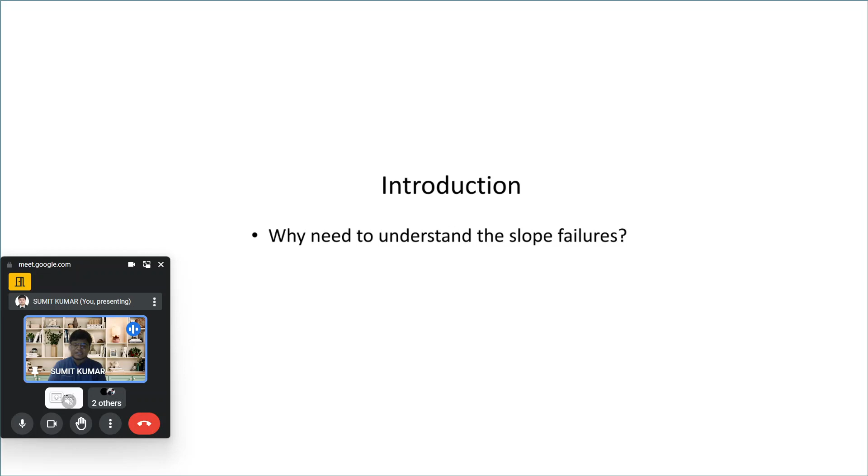We came to understand that there are several regions where slopes are present, and construction over there may sometimes be in danger, whether those are road projects or projects related to buildings. So these aspects need to be understood and taken care of.

So it's our duty that before construction at any place, whether the slope behind it will be stabilized or not, whether it needs to be stabilized, needs to be taken care of before construction of any habitation or building structure beside or ahead of that.

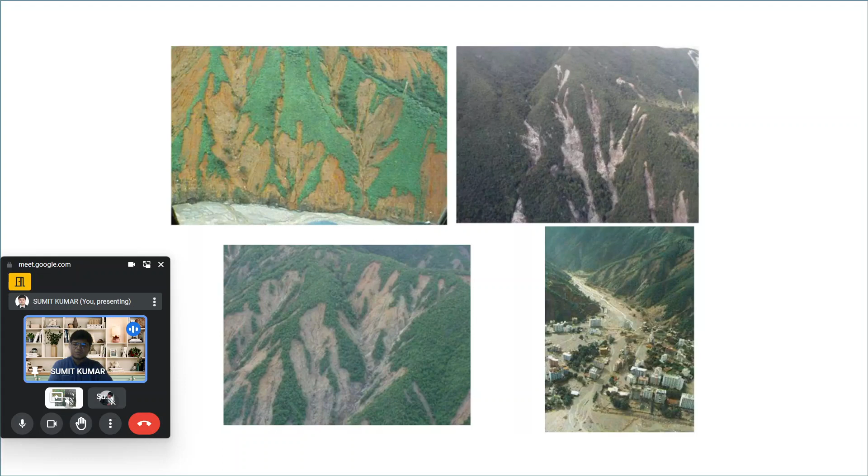In order to understand why we need to study slope and slope analysis, stability of slope analysis - again, a different Indian overall topographical image has been shown, so we can see there are several slopes, some very steep and very vast slopes also presented over here.

Okay, now we come to the section where we develop our understanding regarding the slope and its necessity. Okay, give me a minute, I will take some water.

Now the question is there about the slope and its necessity. An exposed ground surface that stands at an angle beta with the horizontal is called a slope. From the diagram, the facing slope makes an angle beta with the horizontal, which is the slope angle, and constructions take place along those slopes as well.

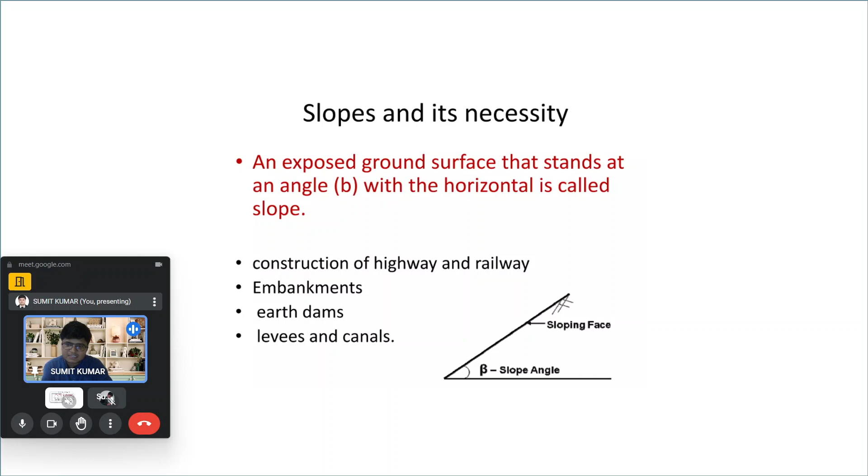The constructions of highway and railway embankments, earth dams, levees and canals could be there in order to provide proper communication as well as protection of people from different calamities.

We have already told that there are infinite slopes and finite slopes. If the section is confined, meaning it has a small section, the slope created is finite. But if the section is very wide across, the slope would be infinite.

When we talk about infinite slopes, they have dimensions that extend over a great distance. In theoretical aspects, the dimensions are very large, and the soil mass is inclined to the horizontal.

We have understood that the angle beta makes with the horizontal is the slope angle. When we talk about infinite slopes, that angle is very less, but if it is high, the slope may be finite at some point of time, as we will see as we proceed.

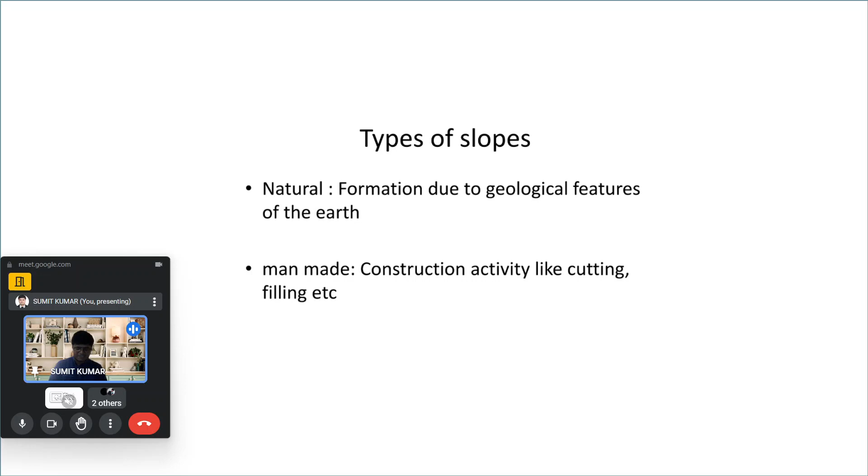Now we have a question: why are we interested in understanding slopes? There must be some outcomes we want to achieve, and that's why we are coming across these aspects. One of the points we want to understand with the help of understanding slopes is the failure of slopes.

The failure of natural slopes, landslides, and man-made slopes have resulted in much loss of life and destruction, as shown in the pictorial representation, where there is habitation and a large number of constructions. As the failure of slopes takes place, the soils fall down and get completely submerged.

That section leads to great destruction. The people residing there may be submerged in those hazards. That is a very disastrous aspect, so we need to understand it. Afterward, we will suggest whether construction activity should be there, and whether stabilization is needed, because the slope could be stabilized with various existing techniques, or new techniques could be achieved to make our understanding very clear. So the safety of natural slopes needs to be checked by civil engineers.

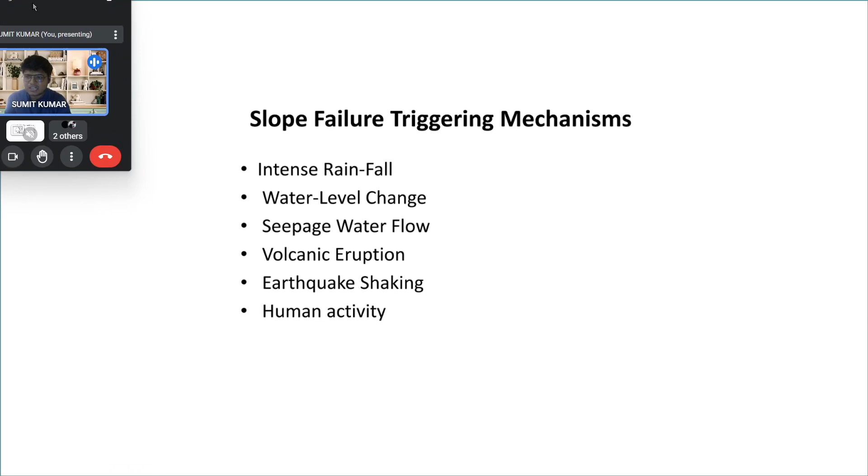When we talk about slope failure triggering mechanisms, we come across several news articles showing that floods or heavy rainfall cause failures. Specifically during the rainy season, we come across news articles about failures taking place due to heavy rainfall, especially in hilly regions like Uttarakhand or some sections in Himachal. In those hilly regions, we see that due to heavy rainfall, the failure of slopes takes place.

So during the rainy season, the change in soil stress takes place due to the change in the water table, because water is one of the reasons for the change in effective stress, as the pore water pressure changes due to an increase in the water table. Pore water pressure increases, so the effective stress gets reduced, and if the effective stress is reduced, the shear strength will also be hampered.

Because shear strength is nothing but S equals C plus sigma dash tan phi, where sigma dash is the effective stress. So if the effective stress gets reduced, the shear strength at that specific section also gets reduced. So if the stress acting there remains the same at that point of time, it will result in the failure of the soil at that section.

So the intense rainfall is one of the triggering mechanisms, and the change in water level takes place either due to rainfall or maybe some other reason like a water facility or a river filled with water, resulting in an increase in the groundwater table, which may result in a reduction in effective stress, concluding in an increase in pore water pressure.

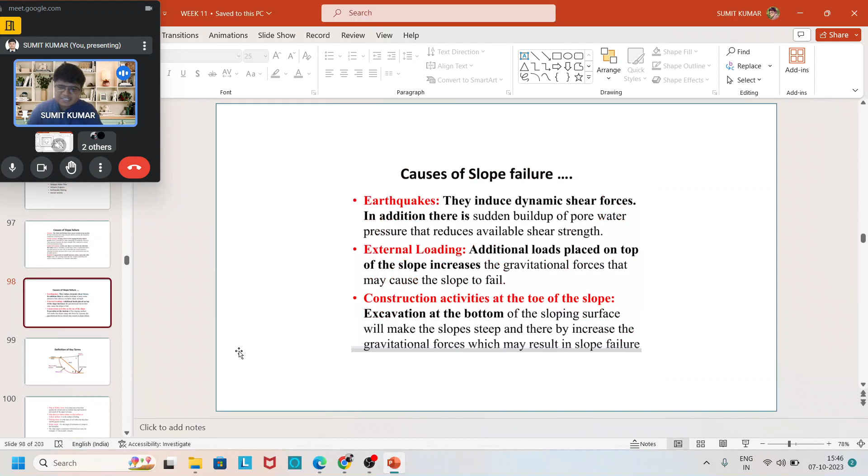Another cause is the earthquake. It induces the dynamic shear force, adding to the dynamic shear force at that section. In addition, there is a sudden build-up of pore water pressure that reduces the shear strength, because due to shaking the pore water pressure may increase, ultimately resulting in a decrease of effective stress. So the earthquake is one of the major reasons in that way.

Now see the external loading. When we talk about external loading, the additional load placed on top of the slope increases the gravitational forces, which may cause the slope to fail. It is not going to happen frequently, but this is also one of the reasons which lead to the failure of slopes.

Now the construction activity, which is a human activity that leads to the failure of slope. Construction activity at the toe of the slope, excavation at the bottom of the sloping surface, will make the slope steep, thereby increasing the gravitational forces which may result in slope failure. This is one of the aspects one needs to understand before considering the causes which lead to the failure of slopes.

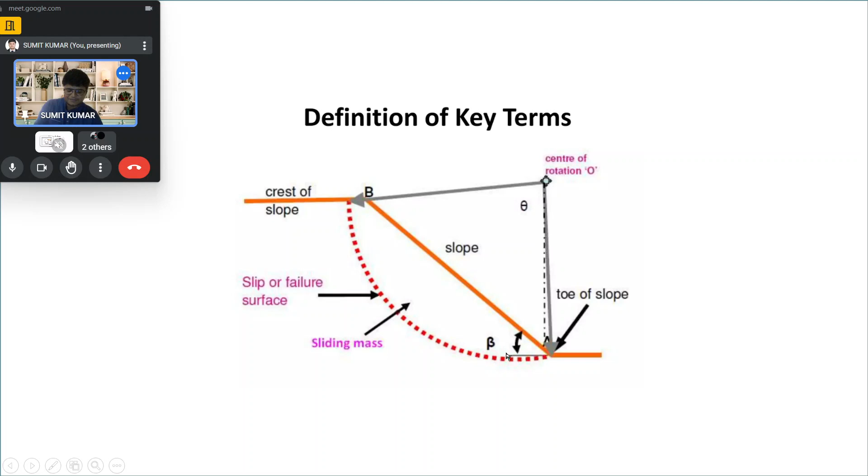Now the slope angle is sometimes referred to as a ratio, for example two horizontal, one vertical, or maybe three horizontal, two vertical. In this way, the slope angle is sometimes mentioned, not always as beta in degrees.

What we mean is that if we take two horizontal, one vertical, it means 2 meters in the horizontal direction, 1 meter in the vertical direction. If we take one horizontal, one vertical, that is 45 degrees - beta is 45 degrees in that case, because you can convert it into the tan angle. Here tan theta is 1 by 2, so theta equals tan inverse 1 by 2, and we are able to find the value of that component.

Now we talk about the type of failure. The failure could be broadly classified into three types: first is the face failure, second is the toe failure, and third is the base failure.

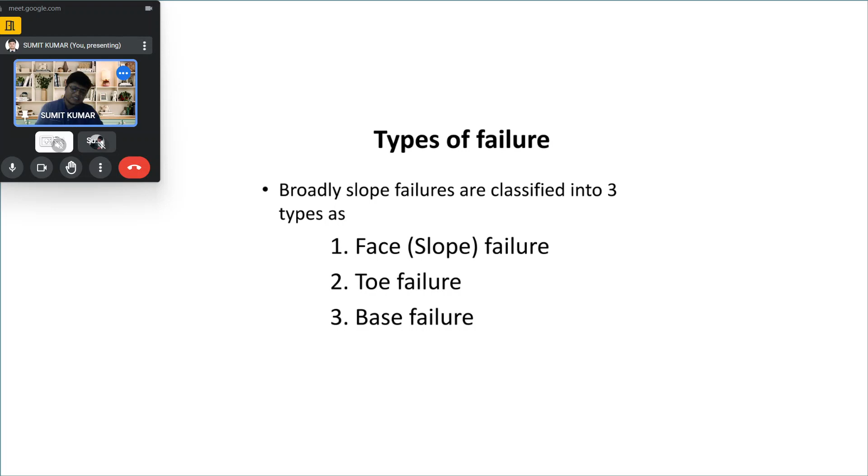When we talk about toe failure, the failure surface passes through the toe. This occurs only when the slope is steep and homogeneous, and the soil at the toe section is the weakest, which is why the failure takes place from this section.

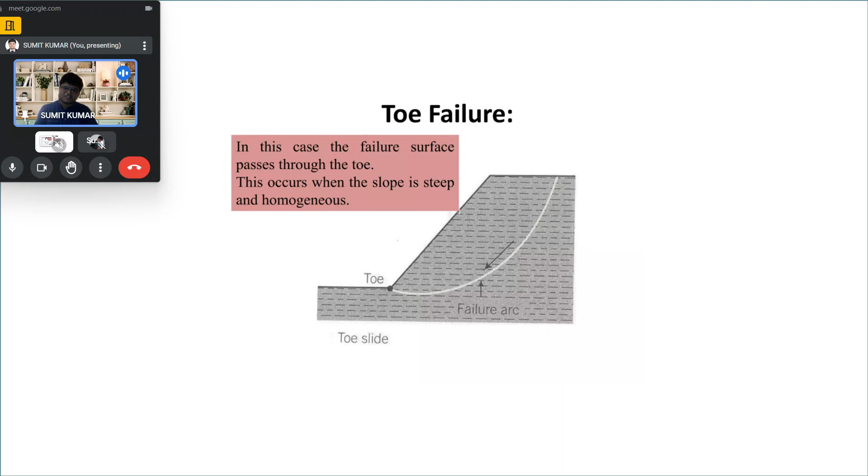Now when we talk about base failure, the failure surface passes through below the toe. This generally occurs when the soil below the toe is relatively weak and soft, so this type of failure takes place.

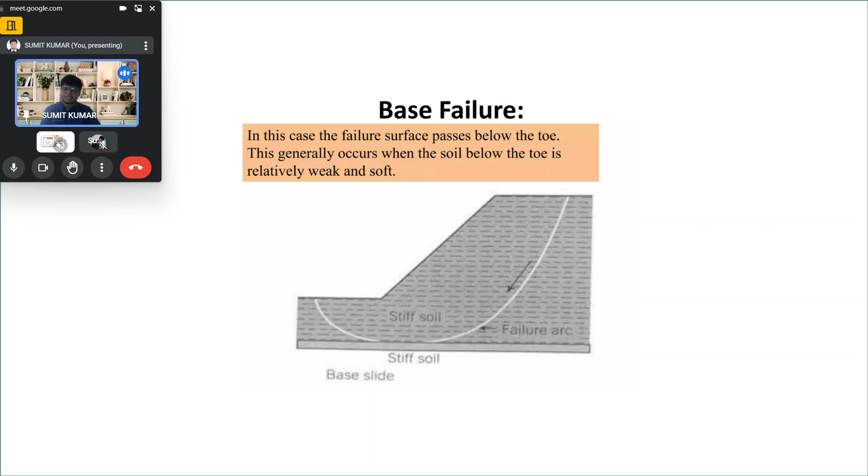We will see how the analysis takes place and how we find the factor of safety. First of all, the factor of safety of a slope is defined as the ratio of average shear strength of a soil to the average shear stress. As I stated, the strength is the maximum that section could sustain, and the shear stress is the value of stress acting at a specific point in time on that section where the maximum strength has already been mentioned.

Now, so the ratio of those terms will result in the factor of safety. The strength is above and the stress which has been applied will be below, and the ratio of those two terms will result in the value of the factor of safety at that section.

Now, the shear strength of the soil is given by tau f equal to C plus sigma tan phi, where C is the cohesion and phi is the angle of internal friction, sigma is the normal stress on the potential failure surface.

Similarly, the mobilized shear strength is given as tau d equal to CD plus sigma tan phi d, where CD and phi d are the cohesion and angle of internal friction developed along the potential failure surface, and the factor of safety becomes C plus sigma tan phi divided by CD plus sigma tan phi d.

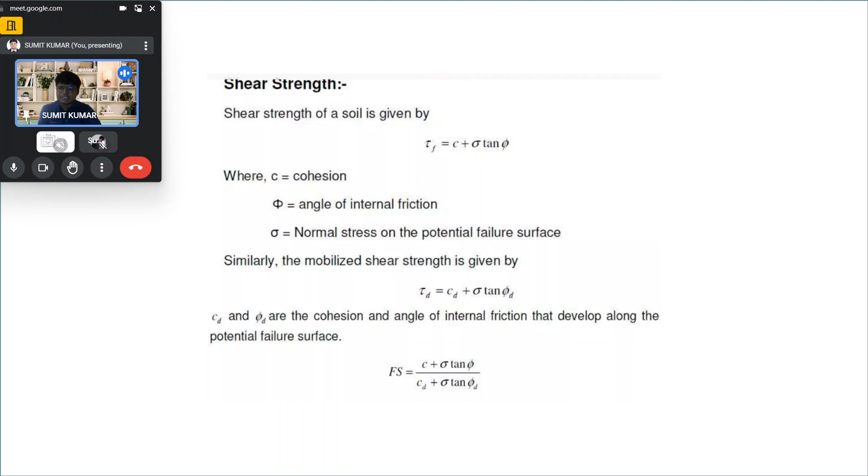So in this regard, we will state our result. The factor of safety with respect to cohesion will be C by CD, where CD is the mobilized cohesion, and when we talk about ultimate phi, F phi is equal to tan phi by tan phi d. So when we say FC equal to F phi, C by CD equal to tan phi by tan phi d.

So Fs equal to Fc equal to F phi. When Fs equal to 1, the slope is said to be in a state of failure, because Fs equal to 1 is the critical state. Just an increase in stress by a unit, or even by a decimal unit, will also result in the failure of the slope surface.

Now first of all, see the finite slope analysis. We will read that aspect first, then we will move ahead.

A finite slope is one with a base and a top surface, the height being limited because it is a finite height, finite surface. For an infinite slope, it is a high length, and from where it starts and where it ends we will not be able to identify very clearly, so we could not state that this much height would be there.

But in this case, the height being limited, the inclined faces of the earth dam, embankment, excavation, and the like are all finite slopes.

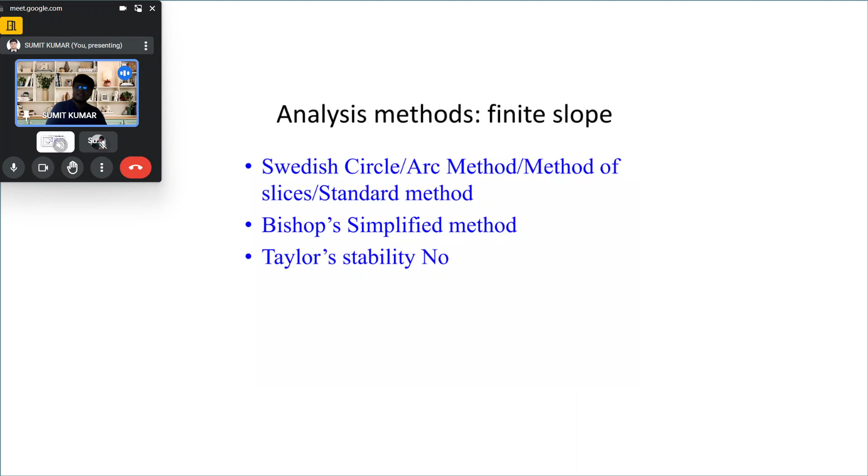Afterward, because this is a trial and error process when studying finite slopes, analysis methods that could be taken care of are like the Swedish circle method, arc method, method of slices, and standard methods. Apart from that, the Bishop method, Bishop simplified method, and Taylor stability number are some of the approaches that could be used.

Now the first is the Swedish circle method of slices for a cohesive frictional soil, like C-phi soil. It's adopted for general soils which have a combined grain of C and phi, the C-phi soils. For the undrained strength envelope shown by the C and phi values, the total stress analysis can be adopted in this regard.

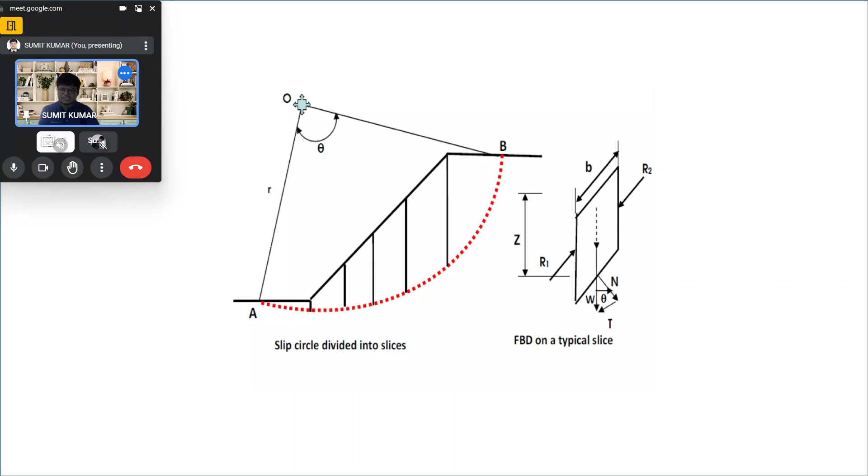Now the first procedure is to draw the slope to scale. A trial slip circle such as AB with radius R is drawn from the center of rotation, and divide the soil mass above the slip circle into a convenient number of slices, more than 5 preferred.

And determine the area of each slice as A1, A2, and AN, whatever the number we have divided, where A will be B into Z. So you see the free body diagram over there, B has been shown and Z has been shown, so the slice should look like that. So B into Z will be the area, and A1 to AN has been found.

Now determine the total weight W of the slice including external load. We are able to find this by B into Z, the area, known, multiplied with gamma, that is kilonewton per meter cube, so the kilonewton per meter load has been found for that section. So gamma is the unit weight, B is the width of the slice, and Z is the height of the slice.

In that way, we are able to find A1, A2, A3, AN. Now the reactions R1 and R2 on the sides of the slice are assumed equal and therefore do not have any effect on stability. The reaction R1 and R2 from both directions have been assumed to be the same, so both cancel each other. Now the weight W of the slice is set off at the base of the slice.

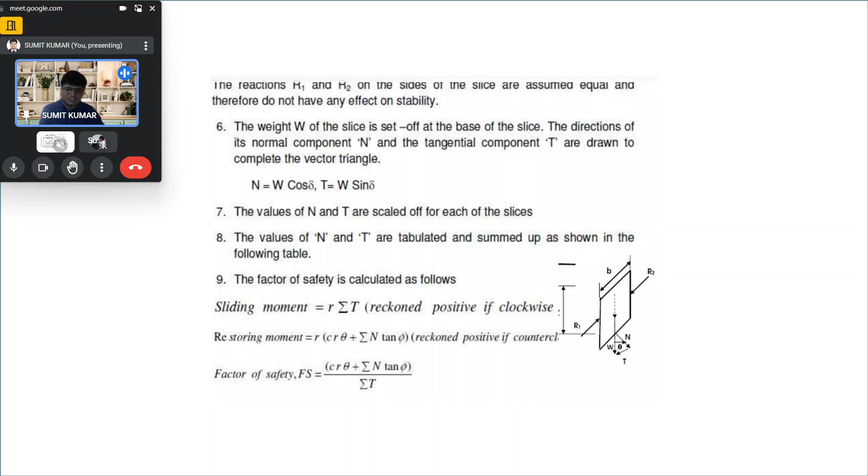Now n equals W cos delta, delta has been shown in the previous slide, and T equals W sin delta has been found, summation of n and summation of T is created. Then to find the factor of safety, we use C, the cohesion, R into theta, theta equals L by R, L equals R theta, and plus summation of n has been found and summation of t has been found, so we are able to calculate the factor of safety.

And now afterwards repeat step 2 to 9 by considering various trial slip surfaces. This has been created by taking one slip surface, and we have already said this is a trial and error method. Afterward, calculate the factor of safety again for each slip circle, and the slip circle with the minimum factor of safety, if the factor of safety is found to be 1, that is said to be the critical circle which has been found. So this is the trial and error process, not very difficult, but it is lengthy.

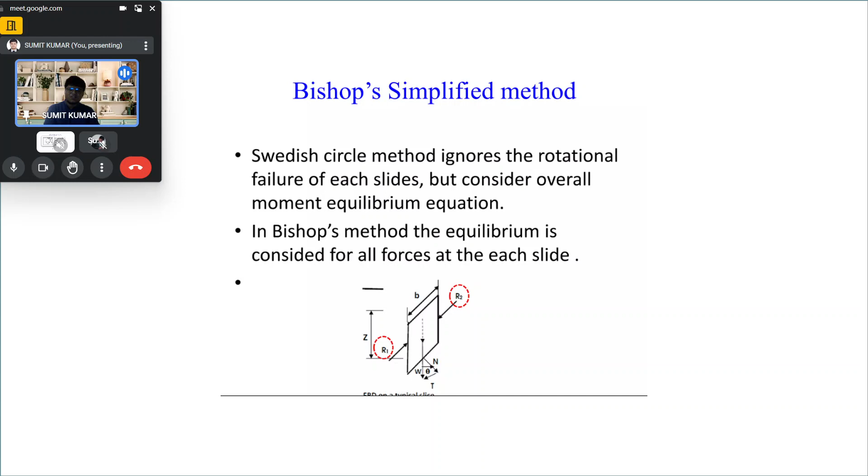Now see the Bishop simplified method. The Swedish circle method ignores the rotational failures, as we have ignored the reaction R1 R2 over there. So in this method, the Swedish circle method ignores the rotational failure of each slice but considers overall moment equilibrium conditions. With the Bishop method, the equilibrium is considered for all the forces at each slice, as we see over here.

Now we move to the Taylor stability number. In slopes, the Taylor stability number is widely used - the component of the self-weight gamma causes the instability, the cohesion contributes to the stability. The maximum height HC of the slope is directly proportional to unit cohesion and inversely proportional to unit weight. In addition, HC is also related to the friction angle phi u and the slope angle beta.

This can be expressed as HC equal to Cu by gamma into F, a function of phi and beta. When the function of phi and beta is dimensionless, the equation above is dimensionally balanced in one way or the other. Now Taylor has expressed the function of phi beta as the reciprocal of a dimensionless number, that is the stability number, popularly called the Taylor stability number.

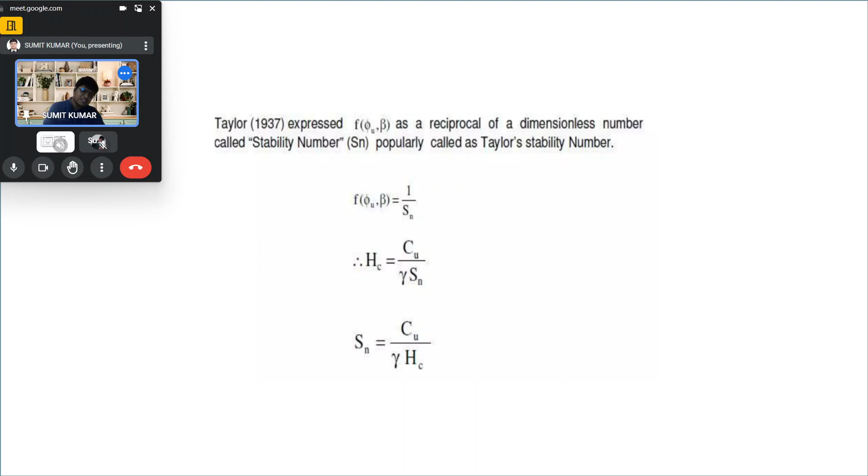So f(phi, beta) is 1 by Sn, and Hc equals C by gamma Sn, Sn equals C by gamma H into FOS, Sn equals C by gamma Hc, Hc equals H into FOS, so Sn equals C by gamma H into FOS. These things are now very much clear. Now we move to the infinite slopes.

So we move to the infinite slope analysis, the slope stability for the earthen dam for different conditions. What are the conditions?

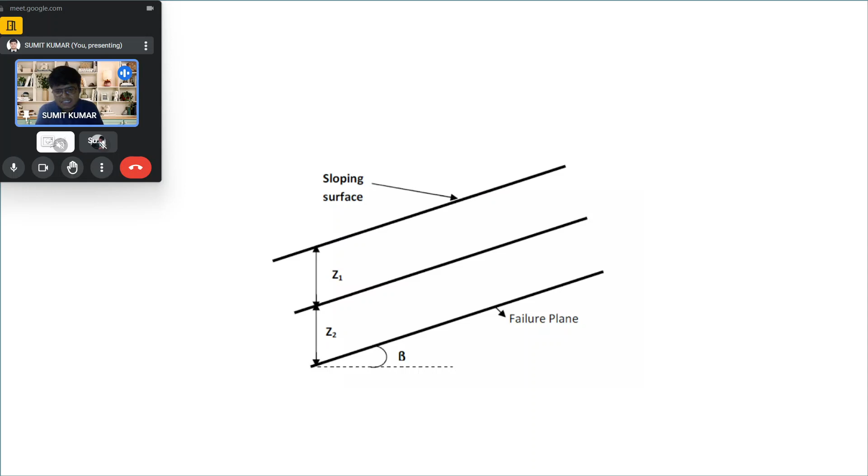When we go ahead, we will find the sloping surface has been shown, and the angle has been denoted beta, and this has a length that varies infinitely. Now, when we take into the analysis, we do the analysis for the cohesionless soil, cohesive soil, and the cohesive frictional soil.

So, infinite slope in the cohesionless soil. When we talk about the cohesionless soil, C is 0, only phi is there.

First of all, consider an infinite slope in a cohesionless soil inclined at an angle to the horizontal, that is beta. Consider an element ABCD of the soil mass, and let the weight of the element be W. The component of W parallel to the slope will be W sine beta, and perpendicular to the slope, N equal to W cos beta.

The force that causes the slope to slide is T equal to W sine beta, and the force that restrains the sliding slope is sigma tan phi, that is N tan phi, that is W cos beta tan phi. So the factor of safety against sliding is the resisting force divided by the sliding force: W cos beta tan phi by W sin beta.

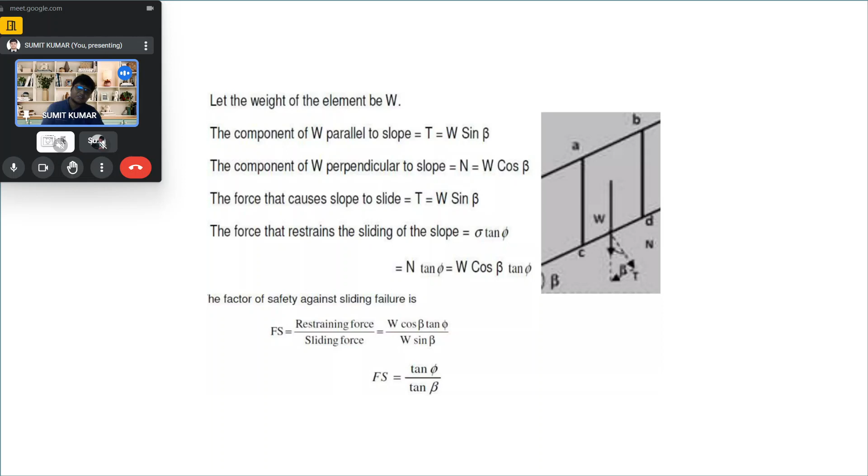So the W and W get cancelled, and ultimately sin beta by cos beta is tan beta, so the factor of safety becomes tan phi by tan beta. Now, applying the concept of limit equilibrium, under limiting equilibrium Fs equal to 1, so tan phi equal to tan beta, meaning beta equal to phi.

That is the critical combination. So the maximum inclination of the infinite slope in a cohesionless soil for stability equals the angle of internal friction of the soil. So whatever the angle of internal friction, that value of beta will be the critical combination for the infinite slope critical conditions.

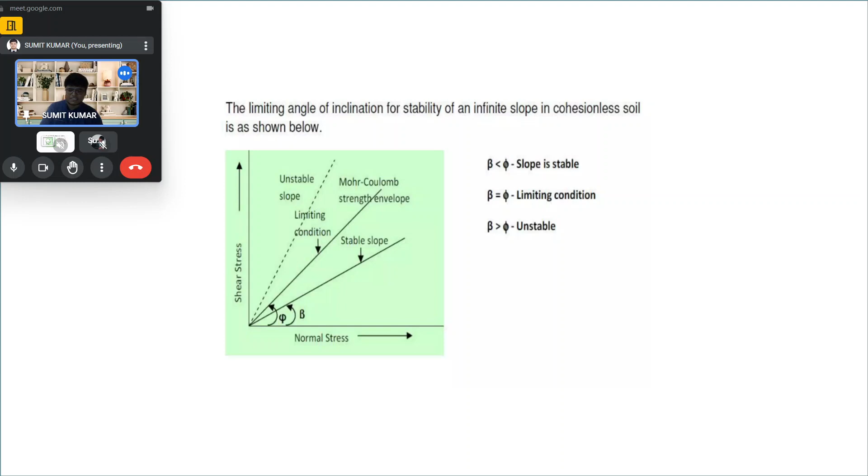So if beta is less than phi, the slope is stable. If beta is greater than phi, the slope is unstable. If beta is equal to phi, the slope is in the limiting condition at the verge of failure. If it has just increased beyond the value of phi, it will result in an unstable slope, that failure takes place. Now, see the infinite slope in the pure cohesive soil.

Again over here, the normal stress at the failure surface, sigma equal to N by L into 1, and cos beta equal to B by L. So L equal to B by cos beta, and where W equal to gamma Z B as earlier, and sigma equal to gamma Z B by B into cos square beta. So that gives gamma Z cos square beta. So sigma n equal to gamma Z into cos square beta.

Similarly, sigma n ultimately becomes this value. Now, tau d equal to T by L into 1, which is W sin beta by L into 1, that is W sin beta by B by cos beta. So this will result in gamma Z sin beta cos beta.

So the factor of safety becomes tau f by tau d, as C by gamma Z sin beta cos beta. So the factor of safety becomes C by gamma Z sin beta cos beta.

In another way, we also know the factor of safety. In general, we write it, and it becomes factor of safety equal to C plus gamma Z cos square beta tan phi by gamma Z cos beta sin beta.

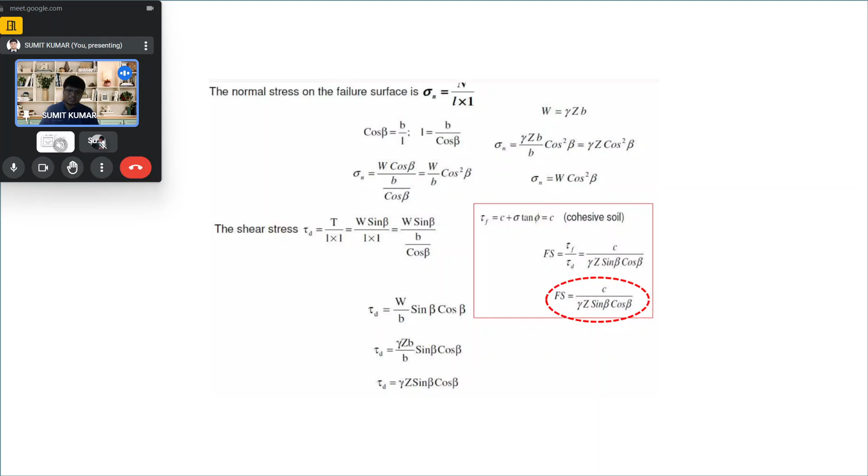We follow the same condition, but here phi is 0. Now, at the critical condition, Fs equal to 1, Zc equal to C by gamma sin beta cos beta, and for the given slope, Zc is directly proportional to the cohesion and inversely proportional to the unit weight.

So you see, C by gamma Z is the dimensionless quantity called the stability number, represented by Sn, and Sn equal to C by gamma H into FOS, where H into FOS is nothing but Hc, which is Zc in real sense.

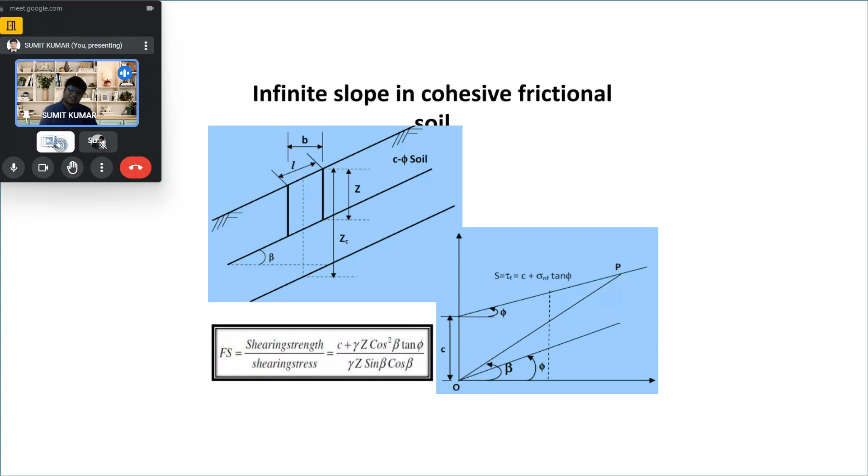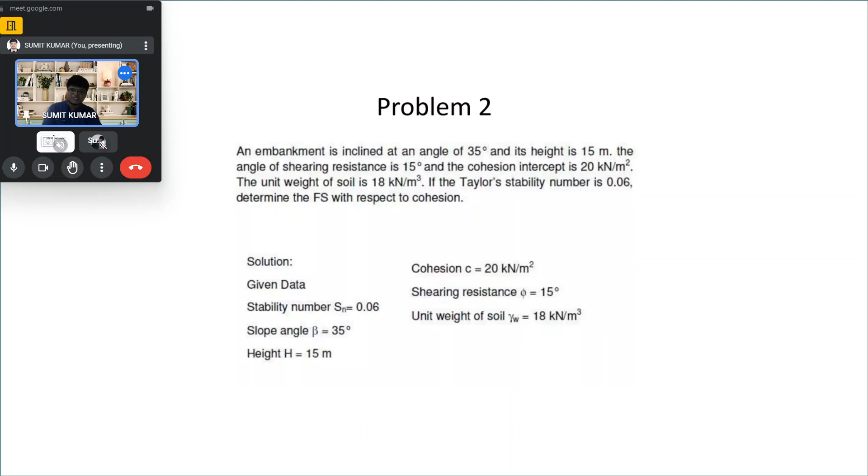First of all, there is a problem here, but I would like to skip this and take it up in the next section. I will take the stability of slopes again to some extent as a revision, and then we will close today's session.

Before moving to this, we will go with the bulkhead, which remained from the last session, and afterward we will come back here. So this is the section which was left during the last session.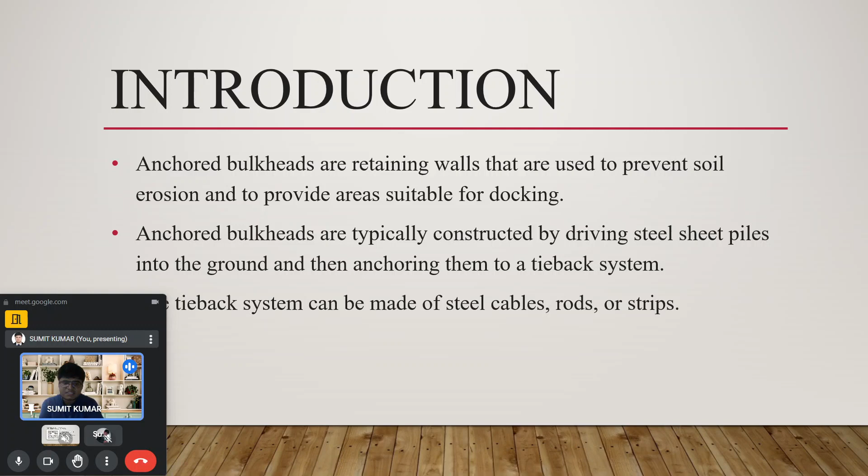Understanding bulkheads: anchor bulkheads are retaining walls used to prevent soil erosion and to provide area suitable for docking. Anchored bulkheads are typically constructed by driving steel sheet piles into the ground and then anchoring them into a tie-back system. A tie-back system can be made up of steel cables, rods, or strips. Anchor bulkheads are used in applications like waterfront construction, riverbank stabilization, highway and railway construction, and land reclamation.

Components of an anchored bulkhead: the sheet piles are the vertical wall that retain the soil. The tie-backs anchor the sheet pile to the ground. The waler is a horizontal beam that connects the top of the sheet piles. Coping is a cap that protects the top of the sheet piles from erosion.

The gravity bulkhead relies on its own weight to resist lateral pressure from the soil. There are two main types of anchor bulkhead: the gravity bulkhead and the cantilever bulkhead. The gravity bulkhead relies on its own weight to resist lateral pressure from the soil, and is typically used in shallow water applications.

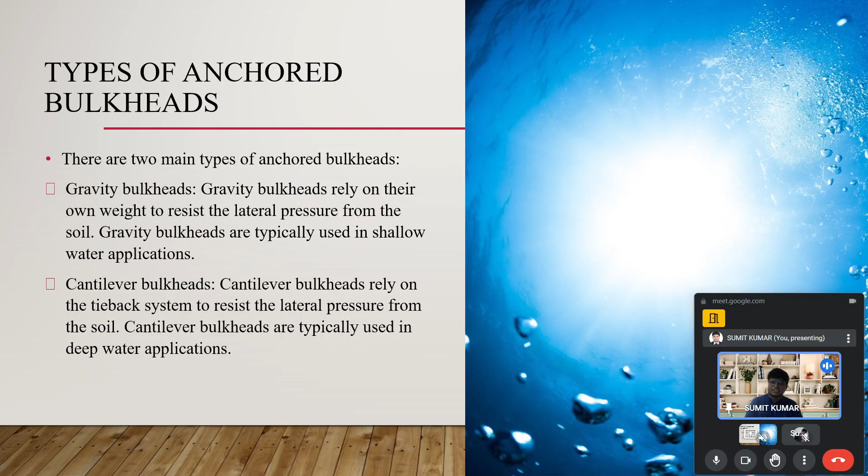Cantilever bulkheads rely on the tie-back system to resist lateral pressure from the soil. The cantilever bulkhead is typically used in deep water applications.

The design of the anchor bulkhead depends upon the type of soil, depth of water, height of bulkhead, and the surcharge load on the bulkhead.

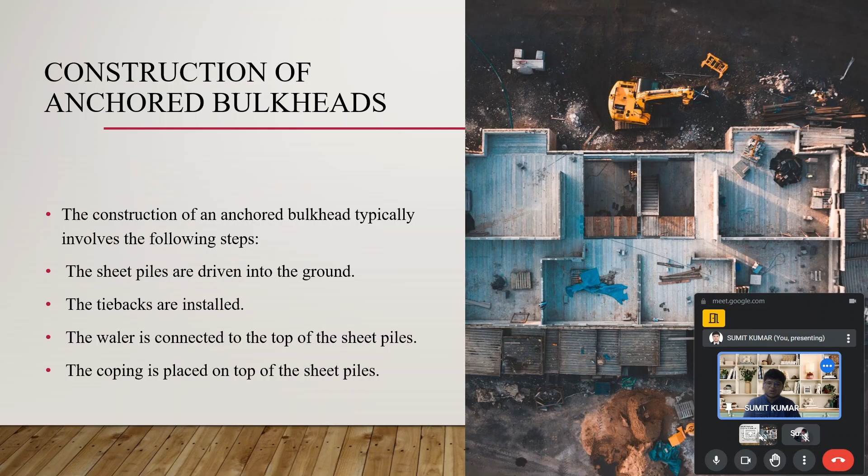Construction of an anchor bulkhead typically involves the following steps: sheet piles are driven into the ground, tie-backs are installed, and the waler is connected to the top of the sheet piles. Coping is placed on top of the sheet piles, the tie-backs are installed, the waler is connected to the top of the sheet piles, and the coping is placed on top of the sheet piles.

Advantages: it can be installed in a variety of soil conditions, it can be installed in confined spaces, it has high load bearing capacity, and it is relatively quick and easy to install.

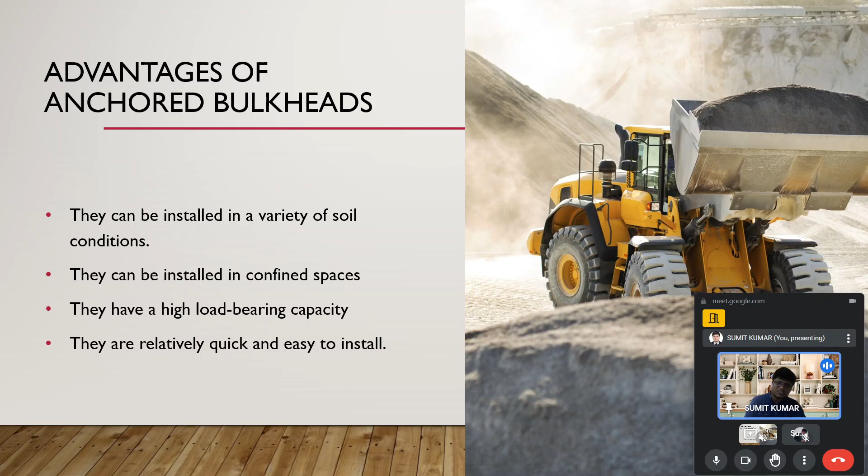It also has some disadvantages, like it is very expensive to install and requires regular maintenance and inspection, which also requires manpower, leading to an increase in cost. It is also susceptible to corrosion, so corrosion resistance work needs to be performed as part of the maintenance, in order to protect and extend the life of this section.

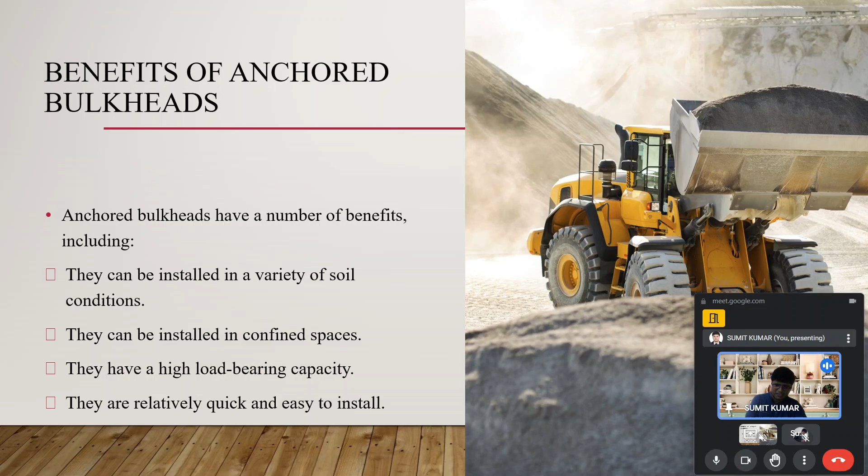Now, the benefits of the anchor bulkhead. Anchor bulkheads have a number of benefits, like they can be installed in a variety of soil conditions, they can be installed in confined spaces, they have a high load bearing capacity, and they are relatively quick and easy to install.

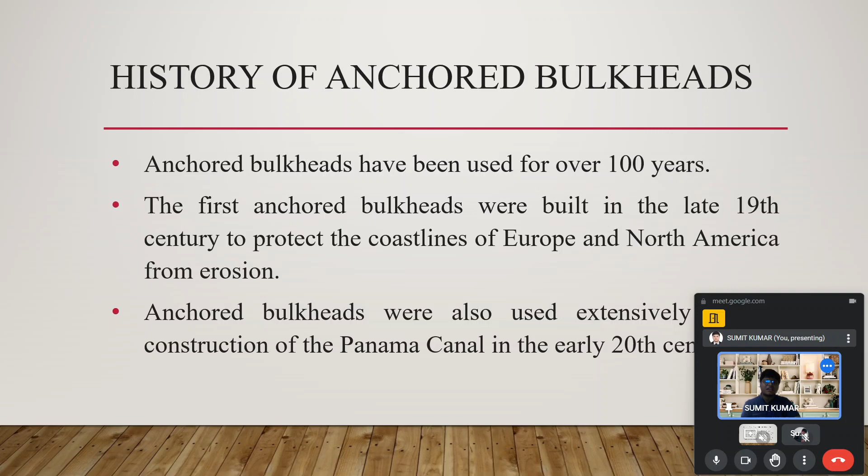The disadvantages were already covered, so I will skip that. Applications include waterfront and river bank stabilization, highway and railway construction, and land reclamation, also already covered. When we talk about history, anchor bulkheads have been used for 100 years. The first anchor bulkhead was used in the 19th century to protect the coastline of Europe and North America, and they were also used extensively in the Panama Canal in the early 20th century.

The types of tieback systems: passive and active are the two types. The passive tieback relies on the friction between the tieback and the soil to resist the lateral pressure from the soil. The active tieback relies on the tension in the tieback to resist the lateral pressure from the soil.

Now, the design procedure of the anchor bulkhead. First, the site investigation is taken, where the engineer will investigate to determine the soil condition at the site. Then structural analysis is performed, where the structural engineer will perform a structural analysis to determine the load that will be applied to the bulkhead. Then the design of the sheet pile wall takes place.

The structural engineer will design the sheet pile wall to resist the lateral pressure from the soil and the surcharge load. Then the design of the tieback system takes place, connecting the soil anchor, sheet pile wall, and the ground. The preparation of the site also takes place by leveling the ground surface.

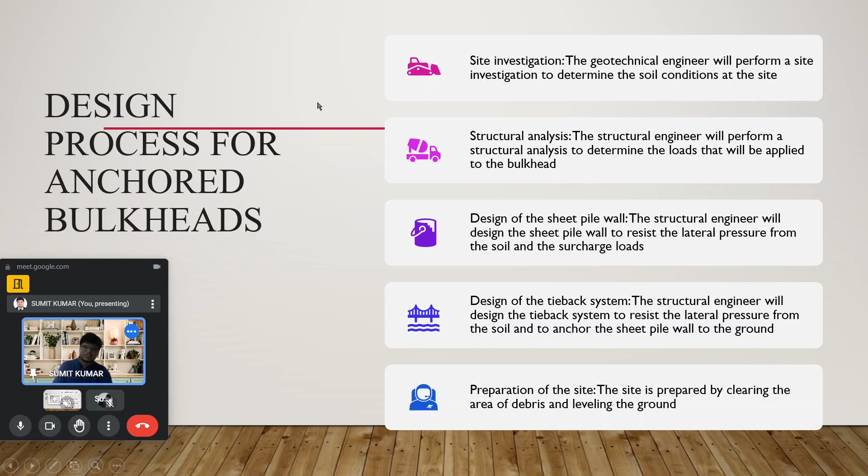Now, the construction process for the anchor bulkhead. It is processed in four steps. First, preparation takes place, then driving of sheet pile walls. We prepare the site by clearing the area of debris and leveling the ground, and afterward drive the sheet pile wall into the ground with the help of a vibratory hammer or a hydraulic hammer.

Afterward, the installation of the tieback takes place, in which a variety of methods are used, like driving, grouting, or jetting. Then the construction and coping processes take place. The coping is placed on top of the sheet piles for its installation.

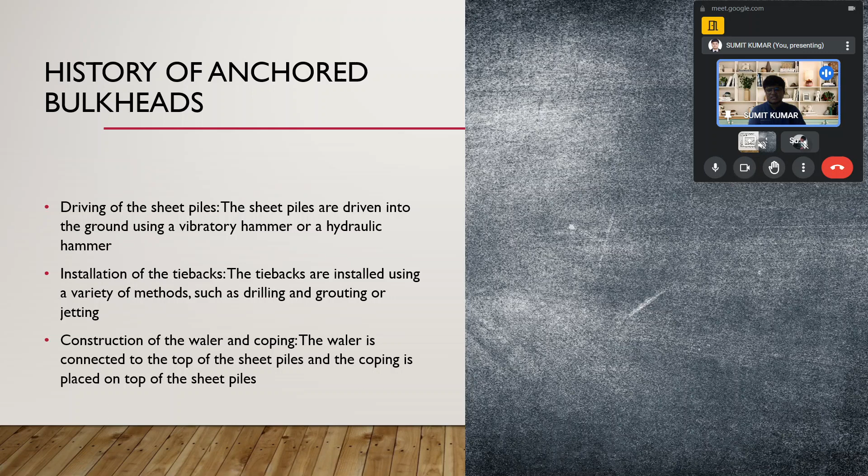Some more points: the sheet piles are driven into the ground using a vibratory hammer or hydraulic hammer, and the tieback is installed using a variety of methods such as drilling, grouting, or jetting. These are the same points which have already been mentioned.

Pile driving tests are performed to ensure that the sheet piles are driven to the correct depth and are properly embedded into the soil. Tieback load tests are performed to ensure the tieback can withstand the design load. Welding inspections are performed to ensure that the welds between the sheet pile and the waler are sound.

Now, when we talk about cost, the cost needs to be justified in anything we do. If the cost is too high or not easily achievable to do the construction work, we will avoid that. The cost of anchored bulkheads varies depending on a number of factors, including the size of the bulkhead, the site, soil condition, and the depth of the water.

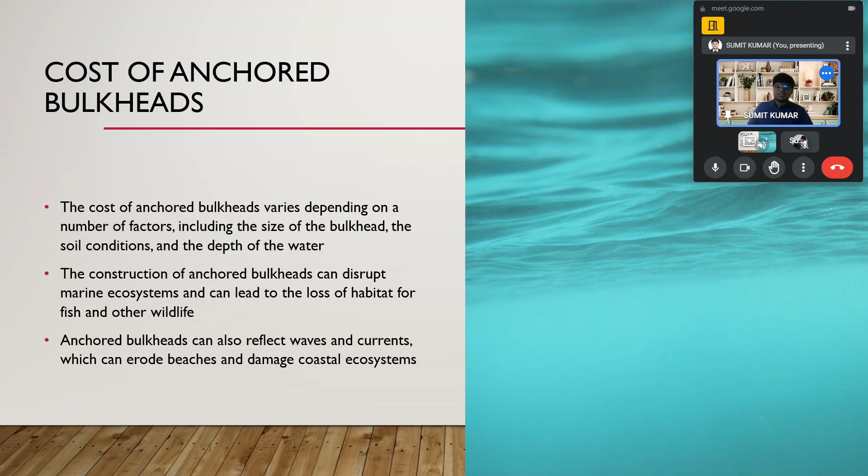The construction of an anchor bulkhead can disrupt the marine ecosystem and can lead to loss of habitat for fish and other wildlife. The anchor bulkhead can also reflect waves and currents, which can erode beaches and damage the coastal ecosystem. Now, regarding quality control and testing of the anchor bulkhead, this is an important part of the construction of the anchor bulkhead.

The following tests are typically performed to ensure the bulkhead construction is correct: pile driving, tieback load test, and welding inspection. The details have been mentioned here, you can go across if needed. These are extra points, not part of the core syllabus, but I will try to discuss them.

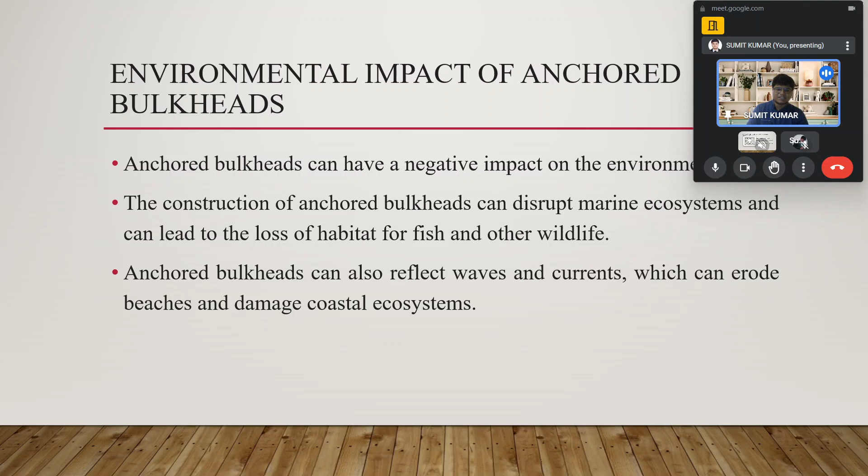The environmental impact of anchor bulkhead. Anchor bulkheads can have a negative impact on the environment. The construction of anchor bulkheads can disrupt the marine ecosystem and lead to loss of habitat for fish and other wildlife. Anchor bulkheads can also reflect waves and currents, which can erode beaches and damage the coastal ecosystem.

Let's look at some case studies. The Panama Canal was constructed in the early 20th century. Anchor bulkheads were used to support the canal wall. The anchor bulkheads at the Panama Canal are some of the largest and most complex anchor bulkheads in the world.

Talking about the second case, the Golden Gate Bridge, constructed in the 1930s. Anchor bulkheads were used to support the approach ramps of the bridge, and the anchor bulkheads at the Golden Gate Bridge are some of the most iconic anchor bulkheads in the world.

The third case, the Hoover Dam, was constructed in the 1930s. Anchor bulkheads were used to support the dam abutment, and the anchor bulkheads at the Hoover Dam are some of the most important anchor bulkheads in the world.

Now, concluding this section: anchor bulkheads can be installed in a variety of soil conditions, and they are versatile and effective retaining wall solutions. They can be used for a variety of applications. However, it is important to note that anchor bulkheads can be expensive to install and require regular maintenance and inspection.

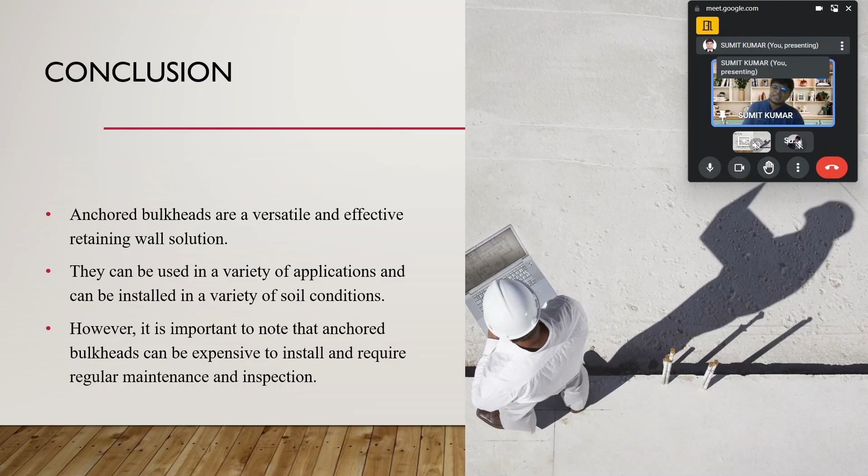Now we talk about cantilever sheet piles. What do we mean by cantilever sheet piles?

Okay, give me some minutes. Let's see. Give me a minute, I have to switch on the charging.

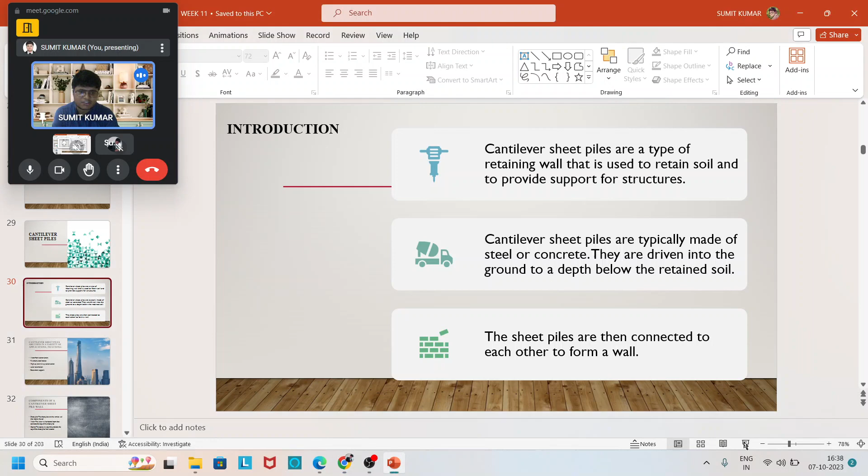Okay, we are talking about cantilever sheet piles. So what do we mean by this, and what is our understanding regarding the same? We will look into that. Cantilever sheet piles are a type of retaining wall that are used to retain soil and provide support for the structure.

Cantilever sheet piles are typically made of steel or concrete. They are driven into the ground to a depth below the retained soil. The sheet piles are then connected to each other to form a wall.

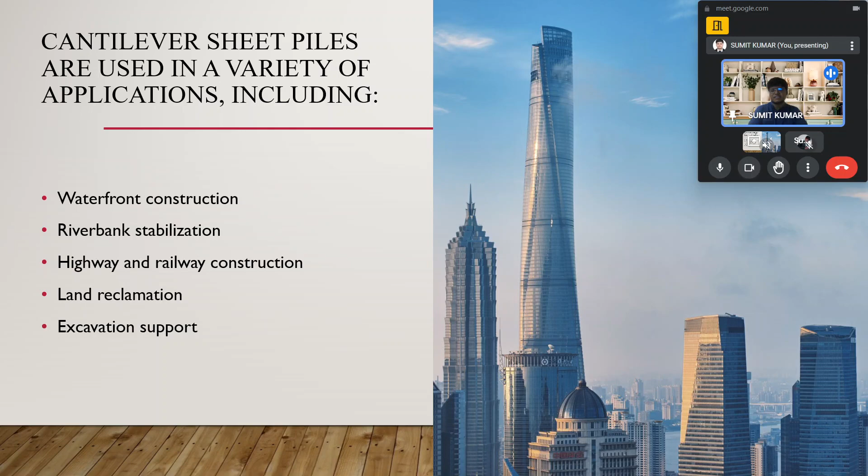When we go across, we will find that cantilever sheet piles are used for a variety of applications, like waterfront structures, as anchor bulkheads also serve that purpose, river bank stabilization, highway and railway construction, land reclamation, as well as excavation support. At all these places, cantilever sheet pile walls could also be used. Anchor bulkheads are also used, but this is also applicable.

When we talk about the components, they are also sheet piles, walers, and copings. The design of cantilever sheet pile walls depends on a number of factors like the type of soil, height of wall, or surcharge loads on the wall.

The construction of cantilever sheet piles typically involves steps like: the sheet piles are driven into the ground, the waler is connected to the top of the sheet piles, and the coping is placed on the top of the sheet piles.

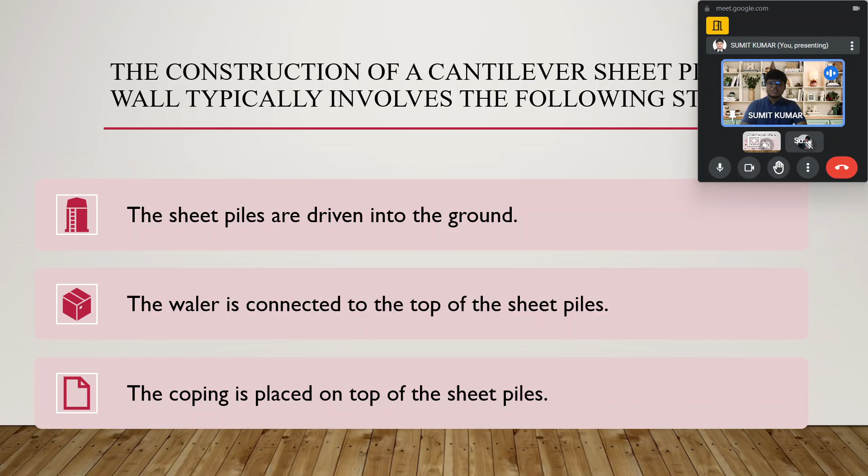When we talk about the advantages: they can be installed in a variety of soil conditions, they can be relatively quick and easy to install, and they have a high load bearing capacity and do not require a tieback or anchor system.

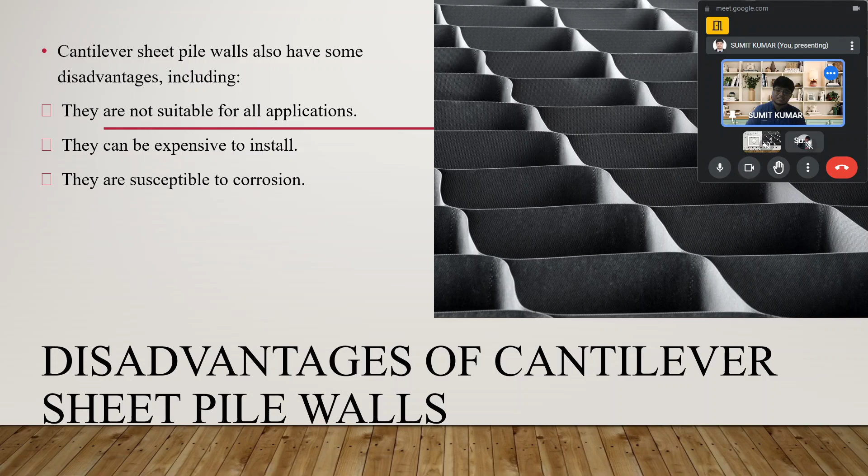Cantilever sheet piles also have some disadvantages, like they are not suitable for all applications, they are expensive to install, and they are susceptible to corrosion. This is also seen in comparison with the anchor bulkheads.

Now, when we talk about applications, we have already gone across this. Cantilever sheet piles are a versatile and effective retaining wall solution. They can be used in a variety of applications and can be installed in a variety of soil conditions. However, it is important to note that cantilever sheet pile walls can be expensive to install and require regular maintenance and inspection.

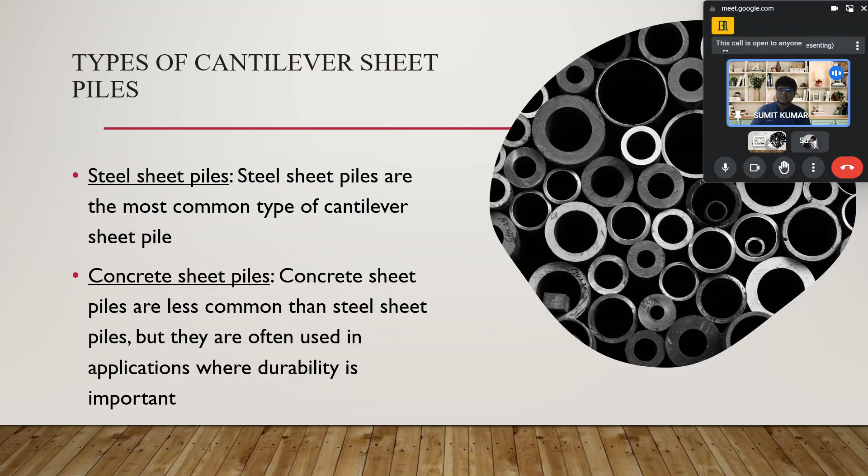Now, when we talk about the types of cantilever sheet pile walls, steel sheet pile walls are the most common type. Concrete sheet piles are also there, though less common than steel sheet piles, but they are often used in applications where durability is important because they have a long life.

Talking about the design, site investigations take place, and after that the design of sheet piles is performed. The construction design of the sheet pile wall is done by design engineers considering the soil, lateral earth pressure from the soil, and the surcharge load. Construction drawings take place, and the engineer prepares the drawing showing the layout of the bulkhead and details of construction.

The construction of the cantilever sheet pile wall involves preparation of the site, installation of sheet piles, and construction of the waler and coping.

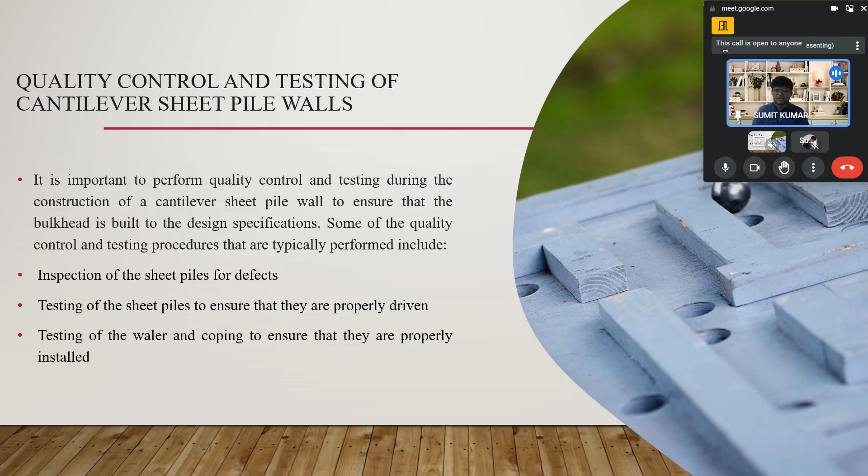Quality control and testing of cantilever sheet piles takes place afterward. It is very important to perform quality control and testing during construction to ensure the bulkhead is built to design specifications. Some typical quality control testing procedures include inspection of sheet piles for defects, testing of sheet piles to ensure they are properly driven, and testing of the waler and coping to ensure they are properly installed.

When we talk about cost, the cost of cantilever sheet piles depends on a number of factors like the size of the wall, type of soil, and complexity of design. Cantilever sheet pile walls can be expensive to install, but they are durable and long-lasting solutions.

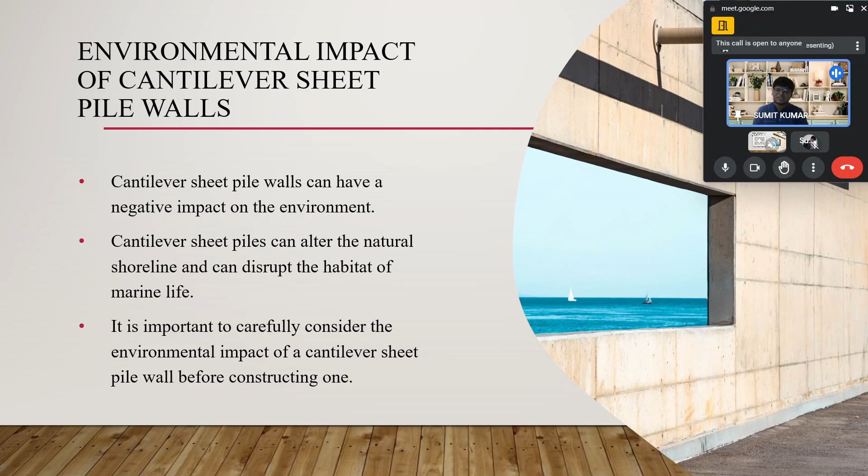When we talk about environmental impact, cantilever sheet pile walls can have a negative impact on the environment. They can alter the natural shoreline and disturb the habitat of marine life, but it is important to carefully consider the environmental impact before construction.

For case studies, the first is the Port of Los Angeles. It is one of the busiest ports in the world, and cantilever sheet piles are used to support the piers and docks there. The cantilever sheet piles at the Port of Los Angeles are some of the largest and most complex in the world.

The second case study is Hudson River Park, a waterfront park in New York City. Cantilever sheet pile walls are used to support the park's upland and protect it from flooding. The sheet piles at Hudson River Park are some of the most important and iconic in the world.

The third case study is the Three Gorges Dam, the largest hydroelectric dam in the world, where cantilever sheet piles were used to support the dam abutments. These sheet piles at the Three Gorges Dam each have their own unique type, not commonly seen elsewhere.

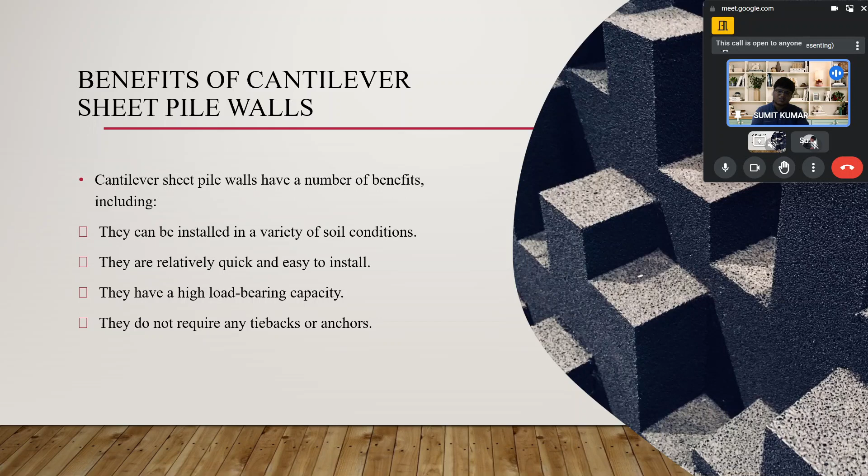Now talking about the benefits of sheet pile walls: they can be installed in a variety of soil conditions, are relatively quick and easy to install, and have high load carrying capacity without requiring tie backs or anchors. As for disadvantages, they are not suitable for every application, can be expensive to install, and may be susceptible to corrosion.

Concluding remarks for this section: cantilever sheet pile walls are versatile and effective retaining wall solutions. They can be used in a variety of applications and installed in a variety of soil conditions. However, it is important to understand that they can be expensive to install and require regular maintenance and inspection.

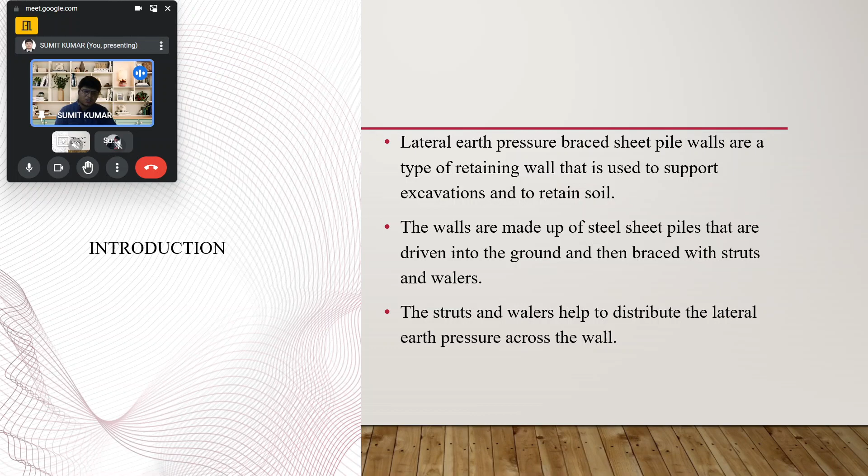The wall is made up of steel sheet piles that are driven into the ground and then braced with struts and walers. The struts and walers help to distribute the load from the lateral earth pressure across the wall.

Lateral earth pressure braced sheet pile walls are used in a variety of applications like deep excavation, tunneling, waterfront structures, slope stabilization, and land reclamation.

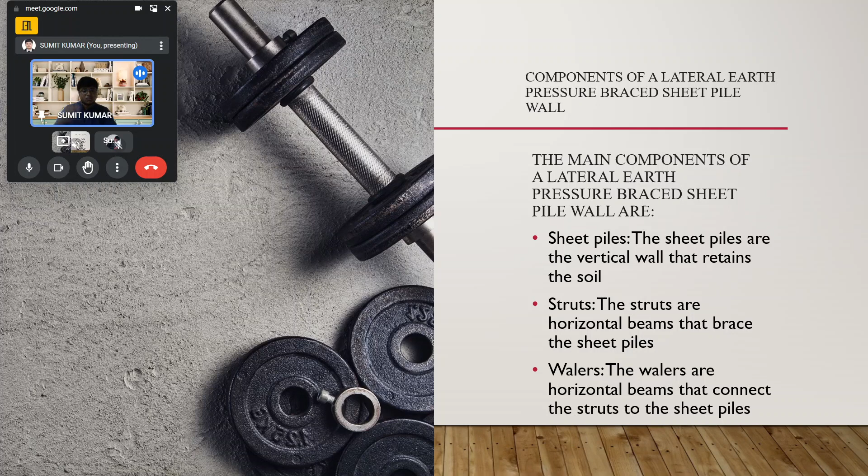The main components of the lateral earth pressure braced sheet pile walls are the sheet pile itself, which is the vertical wall that retains the soil, the struts, which are the horizontal beams that brace the sheet pile, and the walers, which are the horizontal beams that connect the struts to the sheet piles.

Now let's look at the design of lateral earth pressure braced sheet pile walls. This is a complex process that should be performed by a qualified person, and includes steps like site investigation, design of the sheet pile walls, design of the bracing system, and then construction drawings.

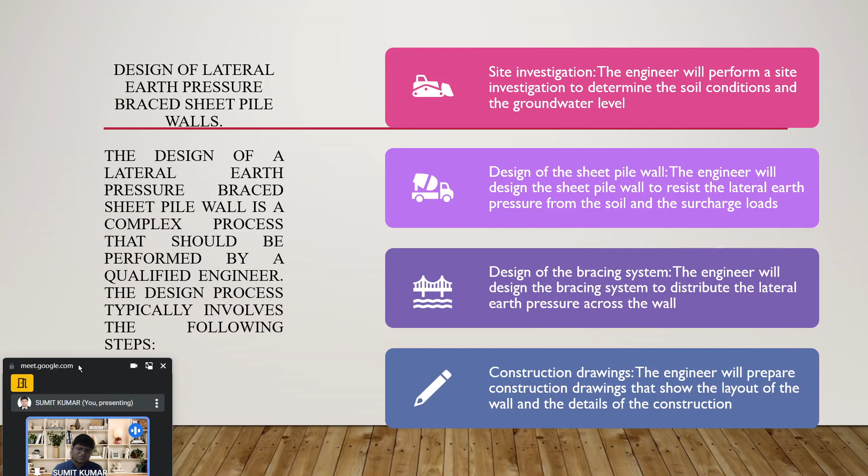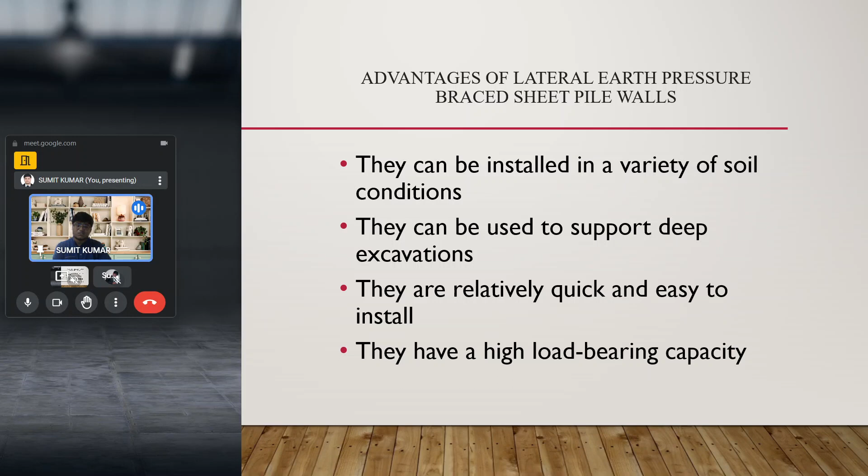Moving to the advantages of lateral earth pressure braced sheet pile walls: they can be installed in different types of soil and can support deep excavation. They are relatively quick and easy to install, and have high load bearing capacity.

Now, talking about applications of lateral earth pressure sheet pile walls, it could be used in waterfront constructions.

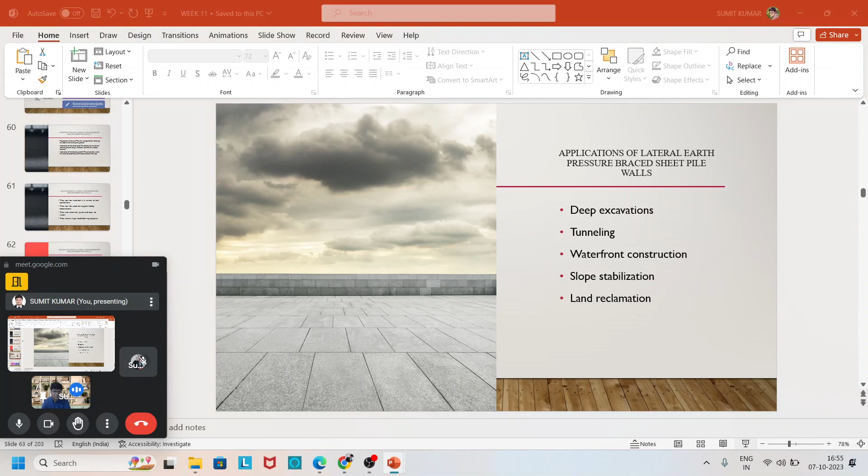Okay, so we are talking about the application of lateral earth pressure braced sheet pile walls. We will finish it quickly. The applications of lateral earth pressure braced sheet pile walls are in deep excavation, tunneling, waterfront construction, slope stabilization, and land reclamation.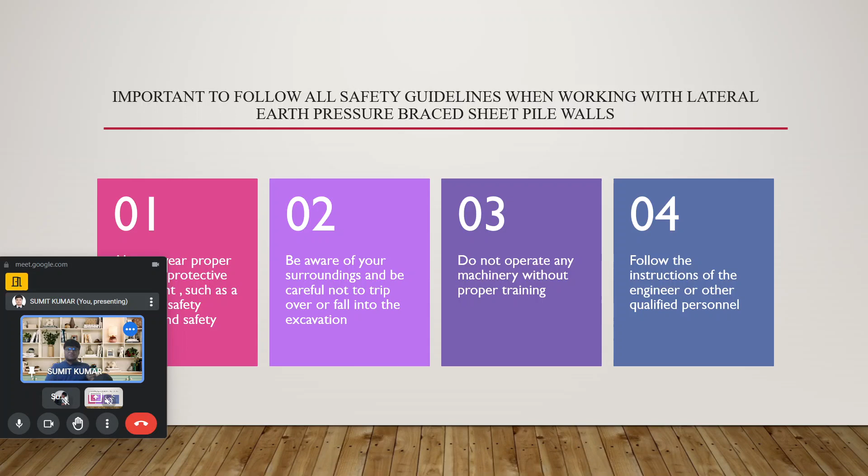It is important to follow all safety guidelines when working on a lateral earth pressure braced sheet pile walls, because safety is also required, otherwise accidents could take place during this work. So we need to take care of that. Always wear proper personal protective equipment such as a hard hat, safety glasses, and safety boots. Be aware of your surroundings and be careful not to trip or fall into the excavation. Do not operate any machinery without proper training. Follow the instructions of the engineer or other qualified person.

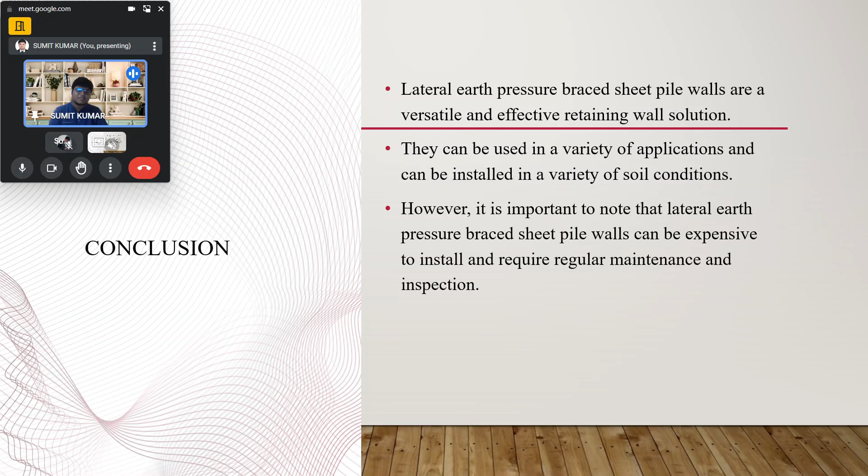Concluding this section, lateral earth pressure braced sheet pile walls are a versatile and effective retaining wall solution. They can be used in a variety of applications and installed in various soil conditions. However, it is important to note that they can be expensive to install and require regular maintenance and inspection.

Talking about lateral earth pressure braced sheet pile walls again from another perspective, very quickly. Starting with the definition: lateral earth pressure is the horizontal force exerted by the soil or other material against a retaining structure. It arises due to the natural tendency of soil to move and redistribute when subjected to external loads.

Talking about its importance in civil engineering, lateral earth pressure is crucial as it directly impacts the design and stability of retaining structures like walls, foundations, and embankments. Understanding and managing lateral earth pressure is essential for constructing safe and durable infrastructure.

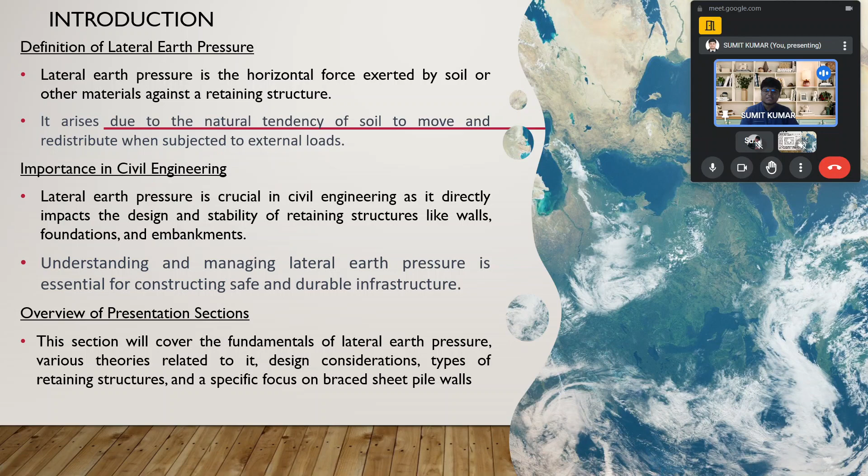Overview of the present section: this section will cover the fundamentals of lateral earth pressure, various theories related to it, design considerations, types of retaining structures, and a specific focus on braced sheet pile walls.

The two primary theories used in understanding lateral earth pressure are the Coulomb earth pressure theory and the Rankine earth pressure theory. This theory provides the foundation for the designers in retaining structure design.

Now, the types of retaining structures. Retaining structures are engineering solutions used to support soil or other material to prevent them from collapsing or sliding. They are essential in various construction and infrastructure projects.

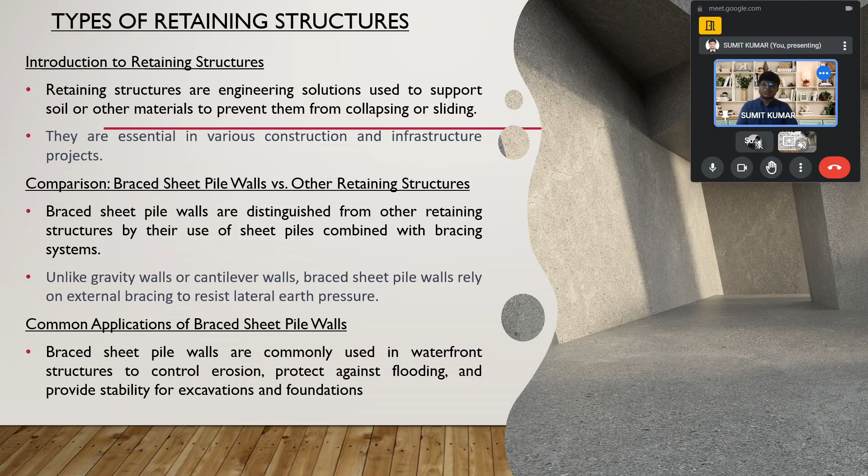Talking about common applications, braced sheet pile walls are commonly used in waterfront structures to control erosion, protect against flooding, and provide stability for excavation and foundation work.

Talking about key components of braced sheet pile walls, they consist of sheet piles that act as the primary structural element. These sheet piles are typically made of steel and form the core of the wall.

The bracing system provides lateral support to the sheet piles. They include walers, struts, and tiebacks or anchors which help distribute and resist the lateral forces.

Tiebacks and anchors are crucial components that anchor the wall to stable soil or rock. They prevent overturning and sliding of the sheet piles.

Facing materials, often made of concrete, timber, or steel, provide protection and an aesthetic component to the wall surface.

Talking about design considerations, these include soil properties, wall height, external loads, groundwater conditions, and project specific requirements.

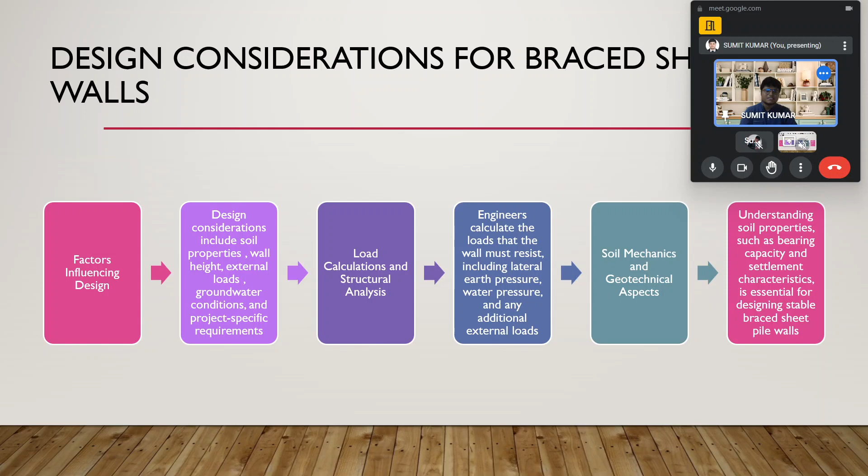Load calculation and structural analysis: engineers calculate the loads that the wall must resist, including lateral earth pressure, water pressure, and any additional external loads. Regarding geotechnical aspects, understanding soil properties such as bearing capacity and settlement characteristics is essential for designing a stable braced sheet pile wall.

Moving ahead, the lateral earth pressure distribution varies along the height of the wall. This includes active earth pressure pushing the wall outward and passive earth pressure pushing the wall inward. At rest, no movement takes place, and the distribution depends on factors like soil properties and wall friction.

Moving ahead, the design process of the braced sheet pile wall involves selecting the appropriate sheet pile type and size, determining the bracing arrangement, and addressing drainage and seepage control to ensure wall stability.

Introducing the bracing system, which provides essential lateral stability to the braced sheet pile walls. They include cantilever bracing, struts, and tiebacks or anchored bracing, each with its own advantages and applications.

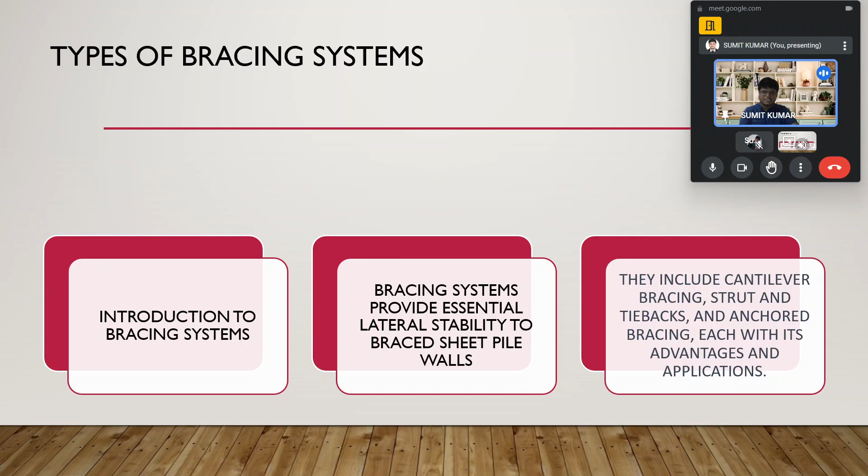Talking about case studies, showcasing real world examples of braced sheet pile wall projects. Case studies provide practical insight into the application of braced sheet pile walls in various construction scenarios.

Talking about the construction and installation phase of the sheet pile wall, the construction process involved excavation and sheet pile wall installation, assembly of the bracing system, and backfilling. Proper sequence and safety measures are critical aspects. Safety during construction includes measures to protect workers, prevent accidents, and ensure the integrity of the wall throughout construction.

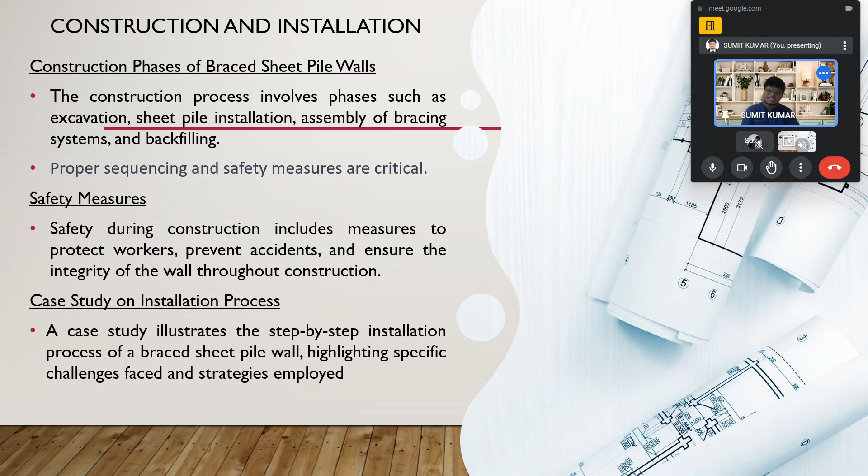Case study on the installation process: the case study illustrates the step-by-step installation process of the sheet pile walls, highlighting the specific challenges faced and strategies employed.

Monitoring and maintenance: regular monitoring is crucial for determining early signs of distress or instability in the wall, and it helps ensure long-term structural integrity. Maintenance consideration is equally important, including routine inspection, repair of damaged components, and addressing any drainage issues. A well-maintained wall prolongs its life and reliability.

Inspection protocols outline the procedure and criteria for assessing the condition of the sheet pile walls, including measurements of anchor tension and wall alignment.

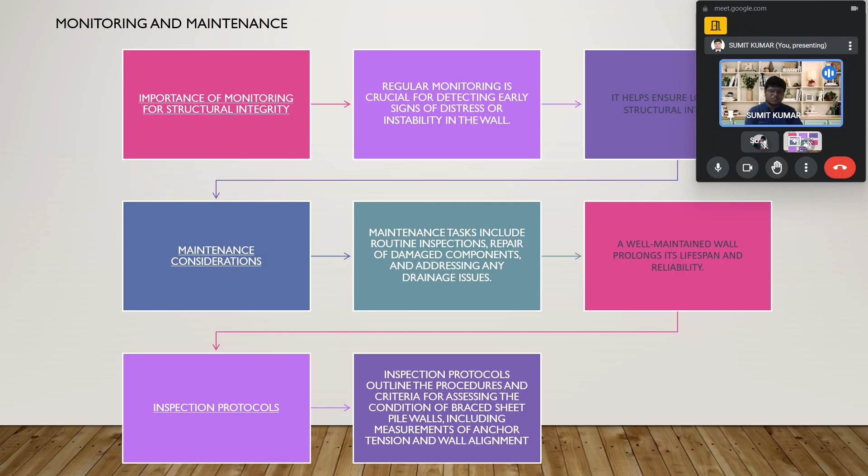Safety precaution is equally important because during construction, safety measures include providing proper personal protective equipment to workers, ensuring safety, and long-term safety considerations like monitoring anchor condition, inspecting the bracing system, and addressing potential hazards like corrosion or erosion.

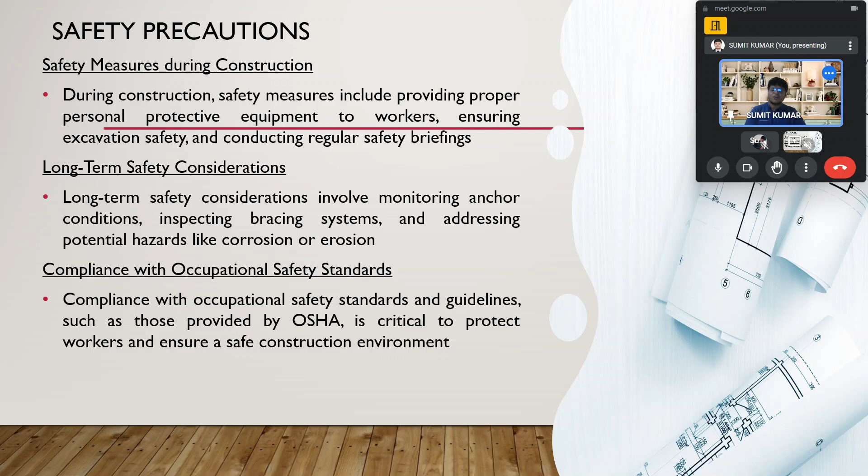Compliance with occupational safety standards means the standards and guidelines provided by different institutions need to be followed, and inspections by the authority need to take place from time to time.

Future trends and innovations: emerging technology in sheet pile wall design may include the use of advanced materials, innovative monitoring systems, and automation in the construction process.

Talking about sustainable practices, sustainable practices in retaining wall design may involve green wall solutions, eco-friendly materials, and designs that minimize environmental impact. Ongoing research and development areas may include improving wall materials, enhancing construction methods, and optimizing design for increased efficiency and sustainability.

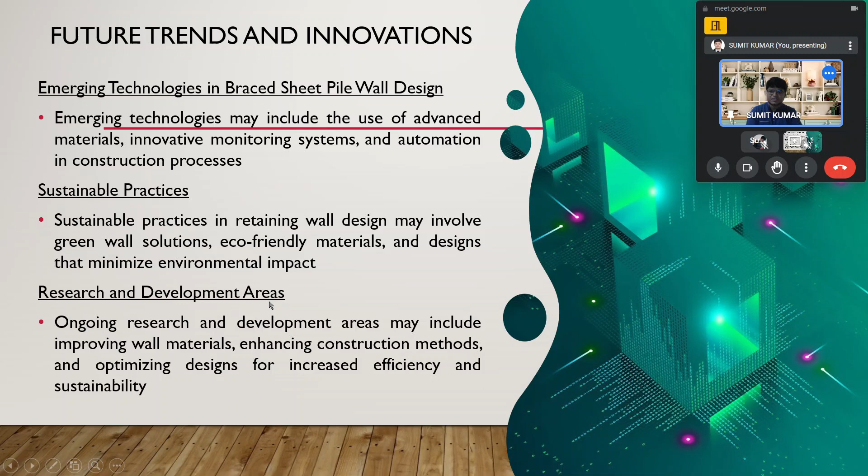Concluding this section with some important points: it emphasizes the importance of understanding lateral earth pressure, proper design, construction, monitoring, and environmental consideration. It stresses the significance of a well-designed and well-maintained sheet pile wall in ensuring the safety, stability, and protection of infrastructure and the environment, and encourages further learning and exploring additional resources to contribute to learning about the complexity of sheet pile walls.